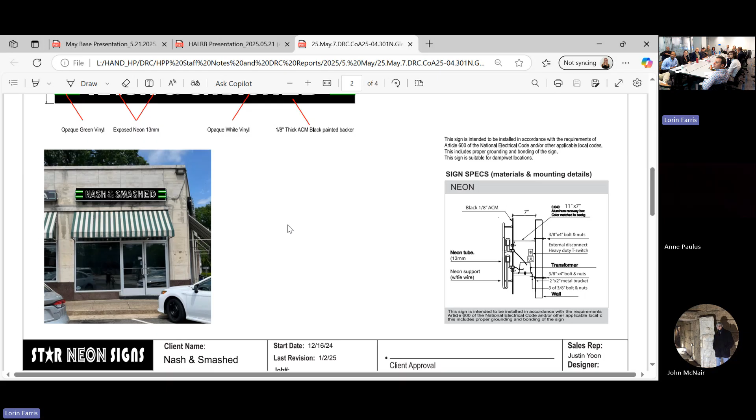See how it's much higher than the other sign, the way it's portrayed, and the ones we've approved in the past have always been the same height. And I know there's a question of how far the depth is away, but it's supposed to be 4 inches and it's 7 inches. I think the staff report said that won't affect how you view it, and I don't have any problems with that, but I do have problems if it's significantly higher.

It looks like it's significantly higher than the next one, same size as that one. Yeah, but I think that's my understanding. I think that the height of the sign is what's there existing.

Previous, see, it looks like it's both higher, maybe it's wider. Boost Mobile, 20 inches. What is the one next to it? Looks like it's less than 20 inches.

Yep, so this is the existing sign right now, right? No, no, it's new. The existing sign says Boost Mobile and it's painted over. There we go. Okay, those are the same size.

The new one looks like it's bigger. I don't think so. That one looks bigger too. It's just the top line instead of bottom. You're right, just the restaurant sign doesn't have the 3 horizontal lines.

Yeah, it is bigger, but that's not what's before us tonight. Is it bigger, or did they just put a graphic on there for the example? Do we know what the actual dimensions are going to be? Are they going to be the same, even though the existing height is...

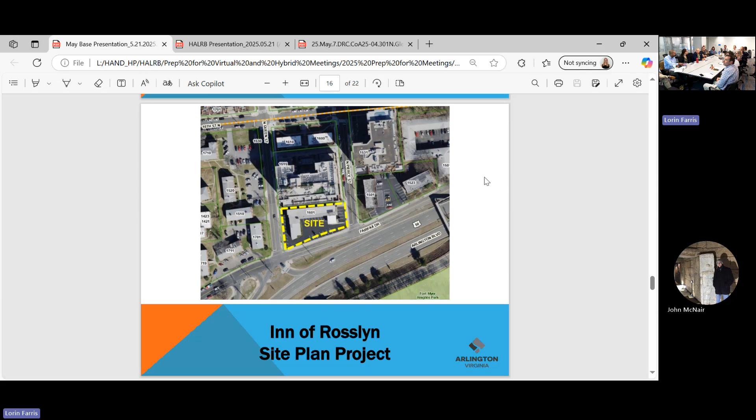Okay, not a problem. And so I have some slides, but the project team also has some slides. So with that, the Inn of Rosslyn site plan project, that's 1601 North, 1601 Fairfax Drive.

And I always like to explain why the HALRB is seeing this project. So the Inn of Rosslyn is on the Historic Resources Inventory, also known as the HRI. It is ranked as important, top third. The HRI ranks garden apartments, shopping centers, commercial buildings. I pulled the text because it's a commercial building based on its historical and/or architectural significance. So the HRI, this is a little learning moment, ranks 394 historic resources throughout the county.

There are 6 ranking categories. Our gold is essential, our silver is important, our bronze is the notable. And then we have the other categories: minor, altered, not historic, or demolished.

So I want to just clarify the important top third. If you look at the number, our properties that are ranked as important is 134 properties. That is our largest category, and that became a bit of a challenge to manage in the early days of the HRI. I believe it was 2015 when the county board, might have been 2017, the county board requested that we really create, it's earlier than that? Okay, well, I'll think about it. That they wanted kind of a subcategory to important.

And so there was a whole scoring system to how the properties got ranked. And basically the properties that are in the top third of the important category were only like 1 point away from being considered essential. And our essential properties are ones where we feel that there's a lot of architectural integrity, or there might be a lot of historical significance, just to clarify that.

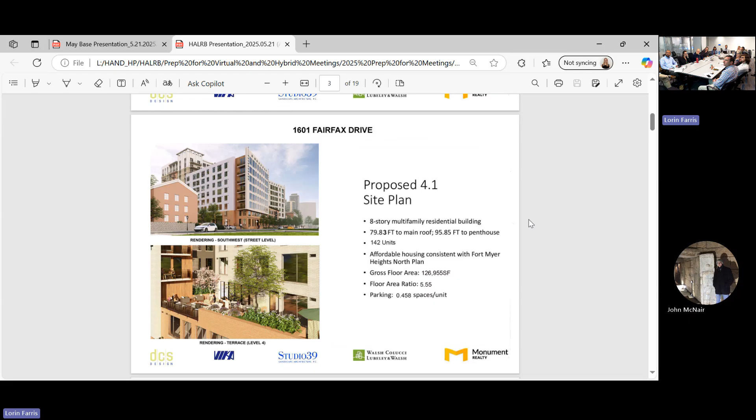We're also open to earning some of the additional density on site with further on-site affordable units. So it's likely that the final proposal for this site would include more than 7 or 8 affordable units, probably a good handful more than that.

Let's move to the next slide. This brings me to the historic preservation aspect of this project. I'm sharing the historic resources map from the Radnor Fort Myer Heights area plan, which is the actual policy guidance for our site. This plan surveyed historic resources in the neighborhood, ranked them, and marked certain buildings for preservation. The issue here is that it specifically did not identify the Inn of Rosslyn for preservation—instead it called for it to be demolished and replaced with new development.

Obviously the HRI, as Lorin was explaining, ranks the building as important, and this is not the first time we've seen inconsistencies across planning documents. Our team understands that the HRI came later and is still a policy that needs to be adhered to and respected—it's the county board's adopted policy.

The challenge for us is that when designing this building, we have multiple competing influences. All of the area plan's recommendations for the building's design don't take into account historic preservation, because when the area plan was developed, no one thought the building should be preserved. The area plan calls for the building to be designed as Art Deco or Colonial Revival, and to mirror the garden apartment aesthetic as we turn the corner onto Pierce Street with open space there. Then we add the desire to preserve some design elements of the existing structure, which is arguably called for by the HRI. So we're faced with three competing design influences that are difficult to satisfy in one building.

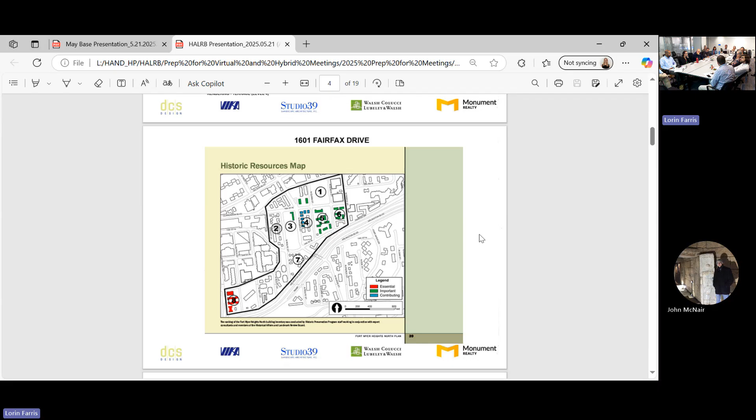We started this four years ago. We thought, this is a 21st century building—now we are going to really do some signature building. So anyway, we are dealing with all these different influences, and the building is becoming more and more complex. But I believe there are benefits in talking to all of you—thank Lorin, and his staff, who are really supporting this project. The only thing is, it's very hard to check all the boxes. So anyway, this is where we are.

The building uphill was designed with Davis Carter Scott probably 20 years ago. I think the whole urban plan, the Fort Myer North plan, was considering these two sites to be developed simultaneously, which didn't happen. So it called for about 8 floors with a very small footprint in relationship with the next door site, to reach a certain FAR level. But right now this whole property is fenced off.

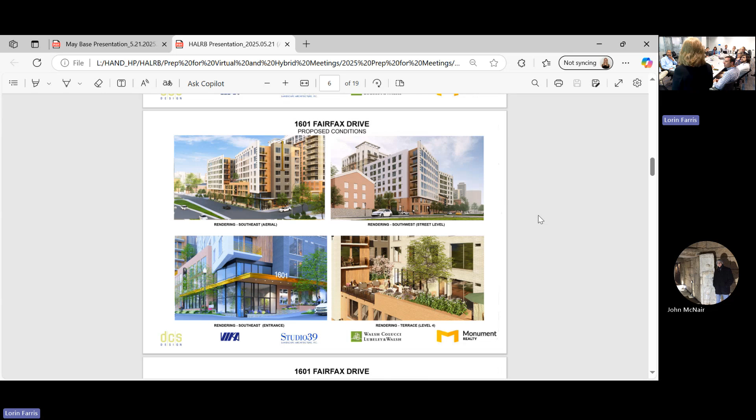So it was the sign that was kind of replicated in proportion, and it's cantilevering. Then there were corners, so that's how we got excited about the building. But it's maybe not part of what we are talking about, so we can slide further. But we think it can be a very pleasant building.

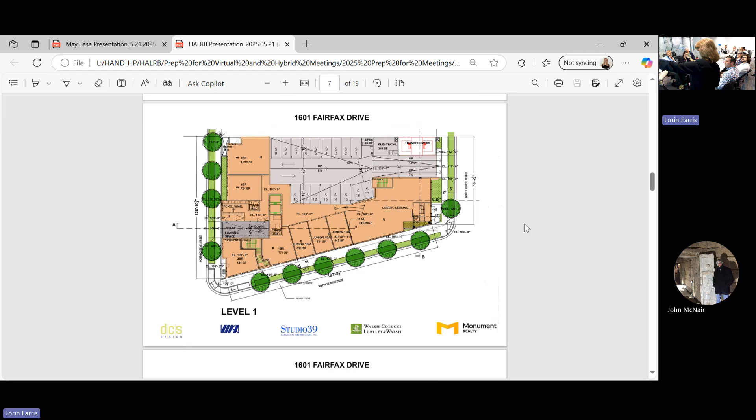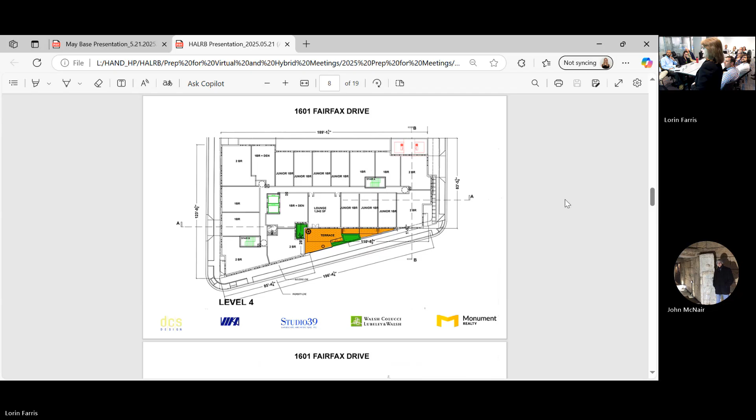This is just here as information, like this is our ground floor plan that by zoning was designed to follow the curb, and all this is incorporated in the Fort Myer North urban plan. So that's a heavy podium, but then when you come up, the top five floors are actually on that concrete podium. This is wood structure, and that's an L-shaped building, creating this terrace for the residents, a little bit more green for the neighborhood.

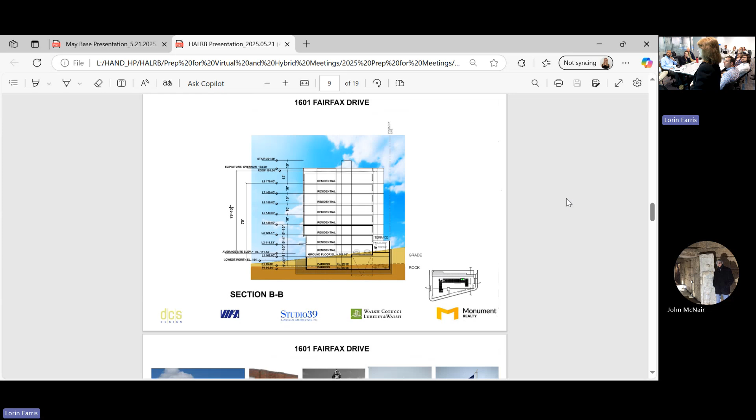This is really here for information. Our bedrock basically goes way higher than this. That was wishful thinking, but we are more here. And that really makes it very expensive and hard to build underground parking and all that. So that's another problem, but here we are.

So some of this is from Lauren, but some of them are from Chris Kreider. We appreciate these nice slides from Arlington, from Miami Beach, and that's mostly Art Deco, which was referenced in the Fort Myer Heights plan as potentially you can be colonial revival, or you can be Art Deco because it's very present in Arlington. But at the same time, we wanted to keep the story going, so we wanted to include some elements of the hotel, and it's really difficult, you start to create a very inconsistent building.

So if you keep going, here we are. We were looking at the existing building and what can be preserved and how can we express that. We work with the sign, we really tried. And at one point we had an L-shaped building that had just an exterior lobby, one story, and it was easy to put that on top.

But when you have a building that has to follow the curve, if you want to mount this on the grade, your first and a half floor is totally blocked. You have a concrete slab in front of you, residential windows. So I think the idea, and partially it came from Lauren, is that we are creating a historic marker.

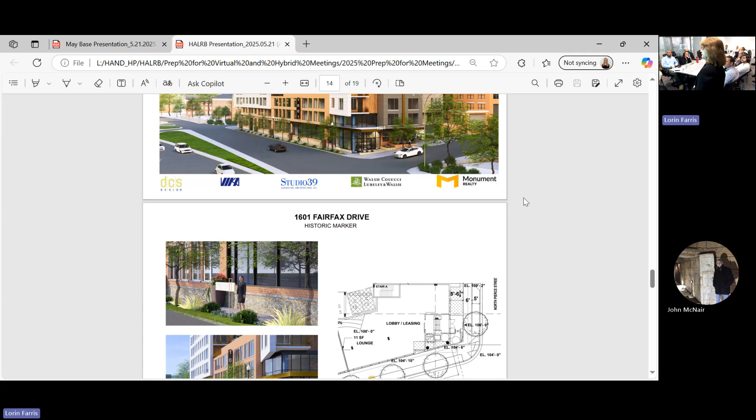referencing it to the motel. And then so that's the sign. So if you're walking by here, you can see there will be - it's kind of bleached, but it's exactly as it is. It's going to be done as is, concrete slab with wheels, with a structure that is gutsy.

We will be talking to the planners. We had to kind of - this is not, the location actually has a reason, like we tried here. So there is infrastructure, we tried here, there are water meters. So it's not bad because this is exactly where it is today, like in reality. And then

that's basically - and then, yeah, you see there is a big storefront that is replicating the 2-story lobby from the motel, and it's going to be a corner entrance. So we did try, we tried, to keep the history present, just not to raze everything and start from scratch. And that's how much we accomplished, really.

So that's how it looks like when you are walking by. It's going to be a very pleasant environment. And everything else is like, this is something with a little bit of Art Deco, making it more historic. And I didn't talk about all these Art Deco elements on the buildings.

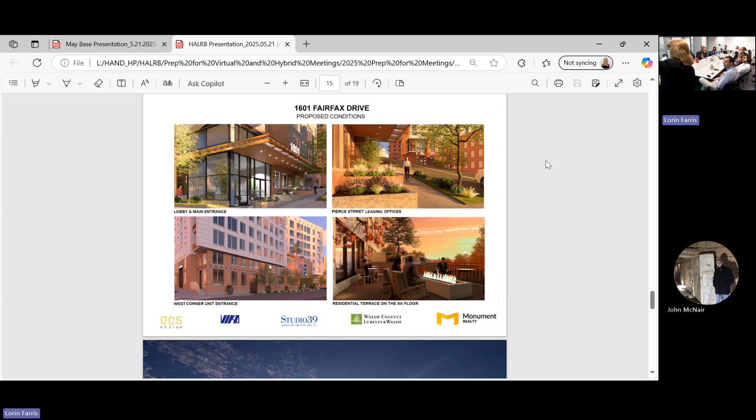Yeah, so these are these coins, it's metal. So if you slide to the big rendering, which is a little bit further here - these are potentially flag poles that have this ornamental metal, which is so typical for Art Deco. And then we are creating these metal medallions that again replicate the language you see on Art Deco buildings, repeating it here and going along the canopy.

Yeah, and the one thing I wanted to make sure we took away here - Yasna explained it really well, but just to put a finer point on it - is that those overhangs, that wall really at the front of the building, that feature is meant in part to mimic the prominent sign as well. That was part of the inspiration for it. So there are a good 6-7 things that we pulled from the existing historic building that we wanted to repeat in the design here while still accomplishing all the other area plan goals, which call for the building to make an urban street edge along Fairfax Drive, which call for open space along Pierce, which call for the Art Deco or the Colonial Revival as well. So there's a lot to put in here, but I think we tried to put it all together in a way that makes the best possible design with all of those different influences.

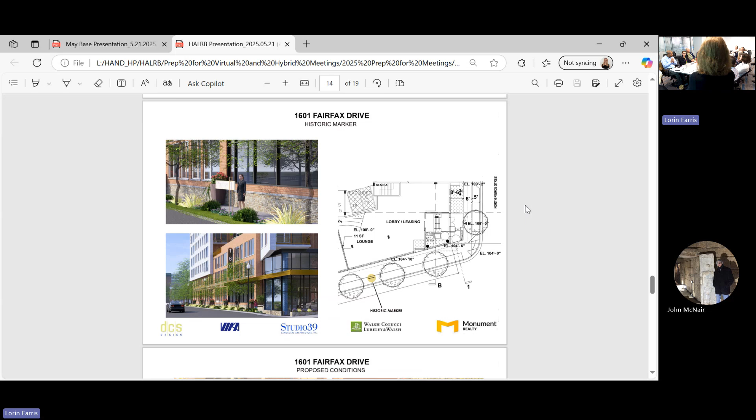So I have a question, because I don't see that the original historic building as anything close to Art Deco. No - oh, that was reference. That's the plan, that's the point. It's not an Art Deco building, it's the area plan. And so why are you putting Art Deco elements on this? Because the area plan calls for an Art Deco building. I thought it didn't call for preservation of any particular building there, just that it called for redevelopment with an Art Deco style building.

Okay, I read through and I'm familiar with the sector plan, but I did not realize that was specifically required for this site. It's a design guideline for everything, and it was in the comments of the staff.

Yeah, of course. We've had detailed, lengthy discussions with staff, and they've urged us to add more Art Deco to the building. Wondered where it came from. Overall, I appreciate how you've blended together so many competing influences and requirements.

That's definitely a challenge. I actually like the nod to the panel, the floating panels on the Route 50 side. I think the way you space the windows, like in the elevation we talked about earlier, really does make it feel dynamic, like you're arriving. I think that captures what I appreciated about Motel 50 previously.

I'm not super attached to the building, but I did like the floating panel, and I think it captures what's happening. I appreciate that you have to integrate some Art Deco elements. I think the way it's done feels more like an applique than an integrated part of the building.

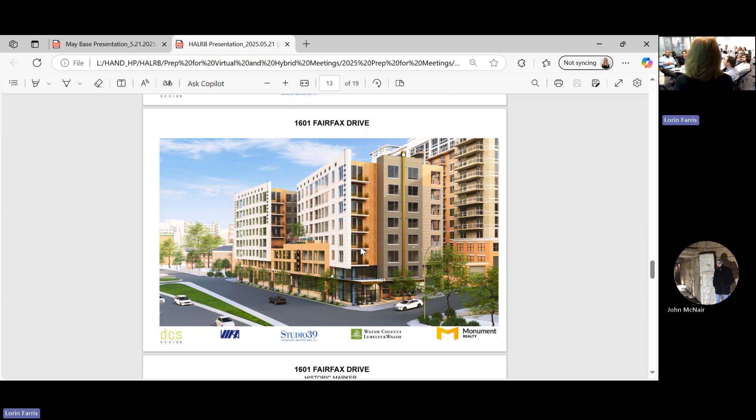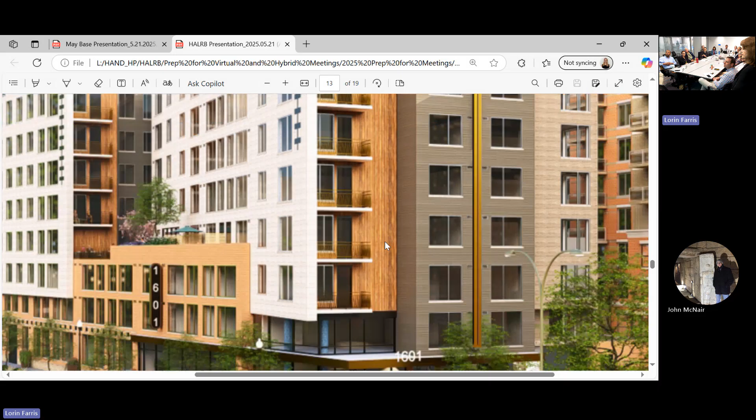I would not encourage reuse on the building. If you wanted to do it somewhere decorative at the ground, sure. But that's a good point, because it would be a serious challenge from a building code perspective. We were using a railing that was structurally potentially unsound, and also has the incorrect spacing at the top, and you would do it on one balcony and the other ten would have it differently.

It may be that, and sometimes we do this with site plan conditions, especially for buildings like this, that if we're able to during construction find something that could be preserved or used or saved, we would at a minimum hand it over to historic preservation staff, but also maybe it's something that gets worked into a display or something else that helps honor what had happened here and what the building had been. It's so difficult to know until you really get in there and start breaking everything apart what can be saved, but there might be a few things that could be part of the lobby display, or even part of a connection to the expression on the back of the historic marker as well.

And this railing, the shape, I was personally kind of intrigued, because you don't see that. So then when we did it from today's standards, it became actually sharp design, and we're using this bronze color, regarding Art Deco, they like old hues like this. I think that's gonna be very attractive on the building, can be anticipating little LED lights, so when you're driving, you see that.

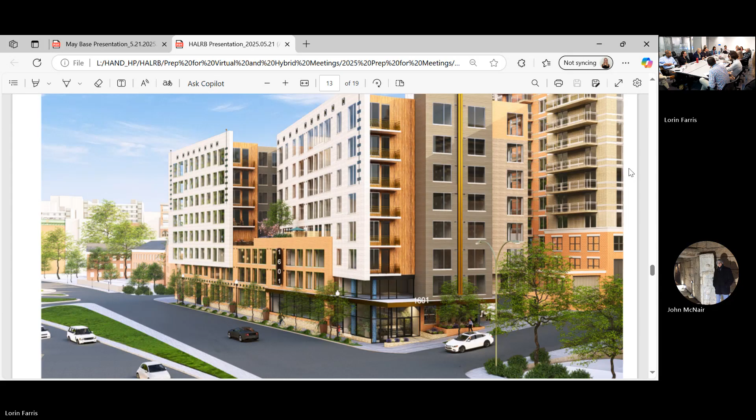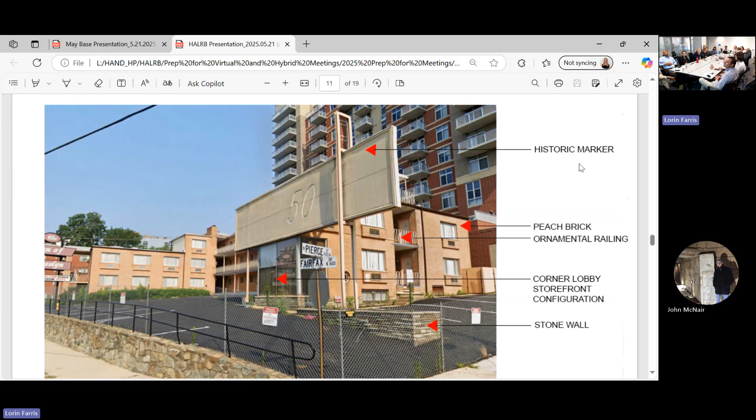So I'm gonna jump in with just a more big picture comment. I know you guys are into the details and I'm not an architect, but I'm sad that the building's gonna be demolished completely. I like your explanation of what you're incorporating, but I think the sign, maybe try to save it in some way. The angles of your project could still be done, especially where the peach brick is, it feels to me like the peach brick is being stopped by that white modern jutting out piece. Whereas if the peach brick came all along, it would almost be like how the Motel 50 sign came out and hung over the property. So I don't think it's an unattractive building, but I don't think it really does much for capturing the current site, or any of the historic properties of the site.

I think the historic marker is cute, that it looks like the sign, but for me it just doesn't really do enough to recognize that it's an important historic resource that we're losing. I feel the same way.

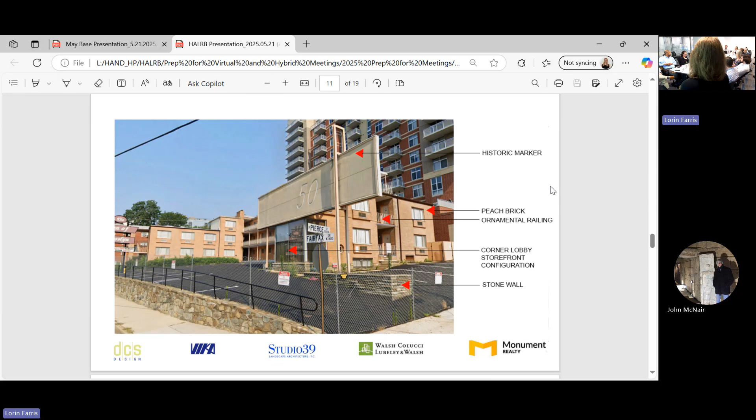So I guess the first thing I want to address is the guidelines. Fort Myer is a very incoherent place, it's just a bunch of different buildings with different styles. So I'm guessing at least one of them had Art Deco, there's colonial revival, there's all sorts of things in there, but it just doesn't seem appropriate to me to try to put all of them on the same building. And I don't see that the Art Deco - first of all, Arlington is not known for Art Deco. It's not like South Beach where you have whole districts of Art Deco buildings. I can't think of any really distinctive Art Deco buildings in Arlington, so I'm not quite sure that this is appropriate here. Maybe the Cinema Drafthouse, there's a couple, the leadership building, but it's not really a distinctive part of Arlington.

And I agree that the elements that are here, to me, read more of just an applique. It's not really - the DNA of the building is not Art Deco, so I'm not sure that it adds anything to it, and I would prefer it without it. I think the massing of the building is actually quite nice and is more in keeping with the motel, which was mid-century modern.

I think having the exposed balconies on the end actually recalls that sense, because it was one of these motels where the quarters are on the outside, and that kind of recalls that to me.

So to address the sign, I completely agree with what Katie was saying. I really hate this idea that we lose historic elements, and then we get a sign that says, oh yeah, there was a historic element there. I find that actually insulting rather than helpful.

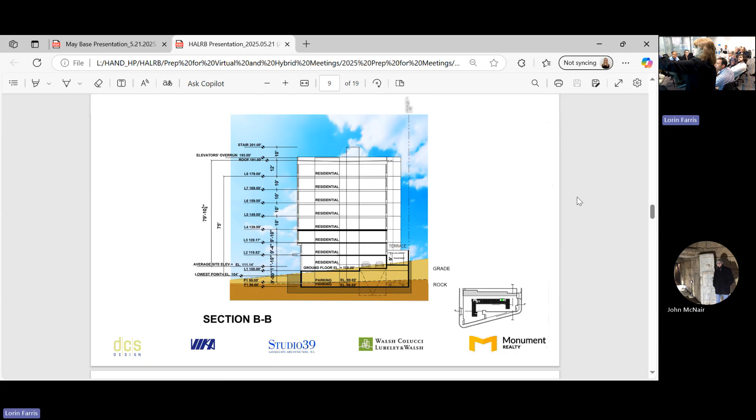No, it's not two stories, but it's a full story. So we have to see that our amenity has clearance and just put it on the wall. We have a garage wall inside because of the ground floor. Josh, if you go to the ground floor, scroll up, Lorin. Even if you had to shorten it a bit, you probably have a high ceiling in your lobby.

But no, it has to be here. Okay, let's look at it. We'll take a look at all these ideas.

I agree with Nick. I think you all have given a really good idea. I think you pointed out how we're all noticing the challenges with two policies conflicting with each other, one having been done before the HRI, and also not thinking of the ways we've come up with more creative approaches to honoring existing architectural styles in new buildings. So these are things we can bring up to my colleagues managing this project with the project team to try and see what can be figured out.

Alice has also been helpful being the representative at the SPRC meetings, and you know when the next one's going to happen.

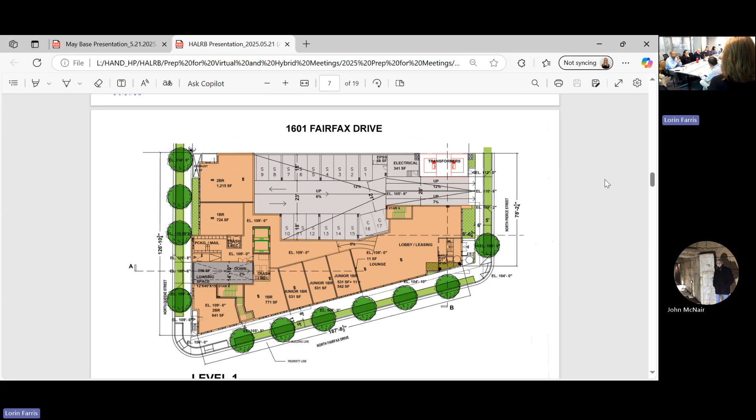I won't pile on to the others. Can we go back to that, yes. I like a lot of the design elements from the existing hotel that you brought in here. I like that you're using peach brick. The one thing about the brick on the existing building is the form of the brick is very distinctive, isn't it the longer, like a long brick with dimension to it. I would suggest potentially looking into that because it's hard to tell from these pictures.

Yeah, it's hard, but you have this to get them close. Well, I think they're long bricks and they have some sort of dimension or depth to them. You can barely see it there, but it's not a standard brick, and the mortar lines I think are very, very narrow. I would suggest pulling that in there, trying to match the colors. It's very monochromatic.

Okay, so our new procedure here is this isn't a project that we approve or deny, but we've been instructed that they want us to log our support or not support. So I'm going to do a motion unless someone else wants to. I was going to do a motion that we don't support the current project as is, unless someone wants to do a motion.

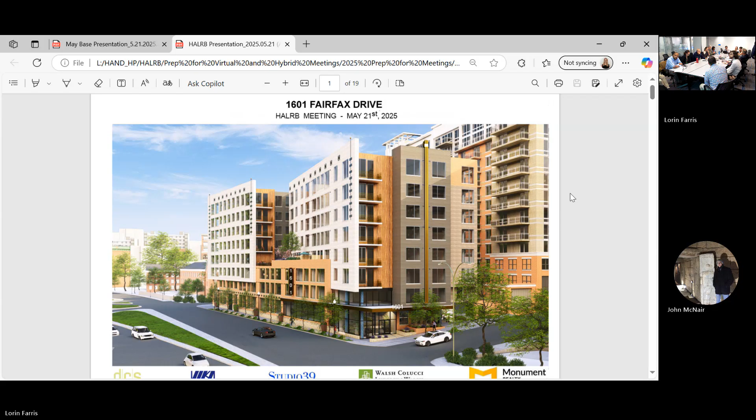I did want to note, not only is Alex serving as the lead on this past project, but she's also going to serve as our primary member for the comprehensive plan update.